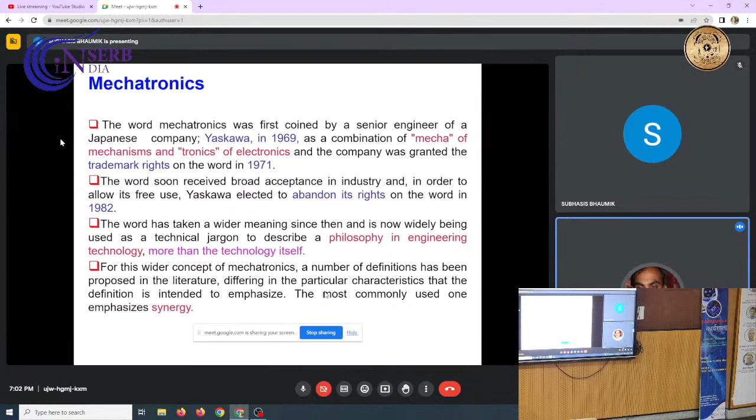So, the fundamental definition of mechatronics: it is the synergistic combination or integration of precision mechanical and electronics engineering in the morphology of the design of either the product or process. So, mechatronics is either connected with product development or process development. The prima facie for the integrated approach of design of complex engineering systems leads to the doping of the concept of electronics and control systems in it.

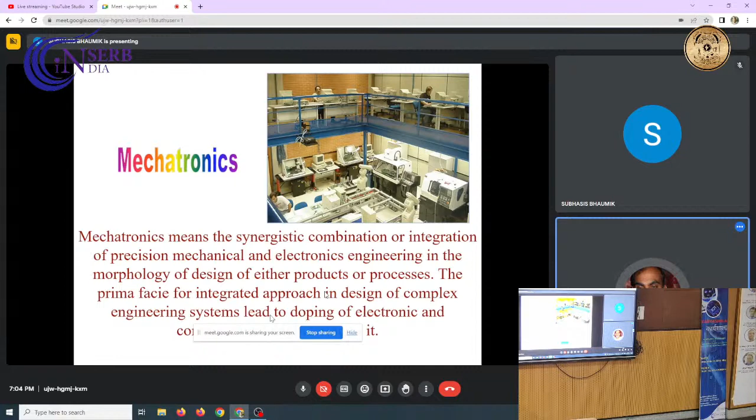So, it will be better if I show you some examples of this kind of products.

There are micro pumps used for pumping fluids, or pumping medicine into patient bodies. Sometimes the doctor wants the medicine injected into the patient's body over a duration of 24 hours, so 10 ml of fluid has to be injected over that period. Whereas in a normal injection process, 10 ml of fluid enters the patient's body within a fraction of a second.

So, there must be some sort of mechatronic system, some sort of automation system, which will work for 24 hours and move the plunger in such a way that there are very small micro-level displacements. Continuously, fluid or medicine will be entered into the patient's body, but over a duration of 24 hours.

Then anti-lock braking systems - most four-wheeler systems nowadays come with anti-lock braking systems. The mechanisms or control systems used for driving all these particular products are nothing but mechatronics.

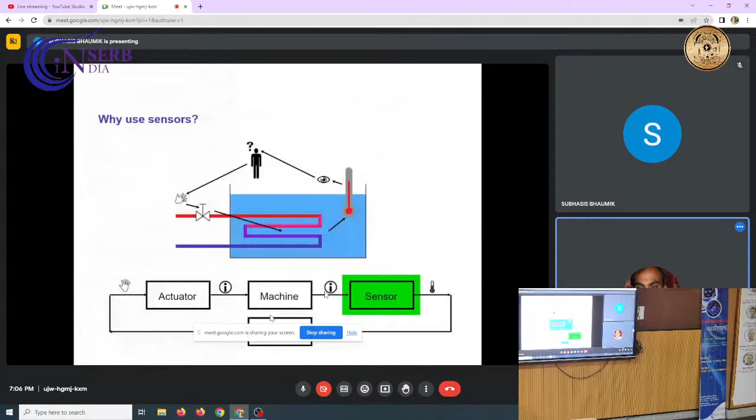If you see the formal definition of the robot: an automatic apparatus or device that performs functions ordinarily ascribed to humans, or operates with what appears to be almost human intelligence. This is basically the Webster definition of robots.

But the actual working definition of the robot has been given by the Robot Institute of America, from the applications point of view: a robot is a reprogrammable, multifunctional device designed to move material, parts, or tools from one location to another in a repetitive way, in a programmed form. So, this definition is more appropriate from the common perspective.

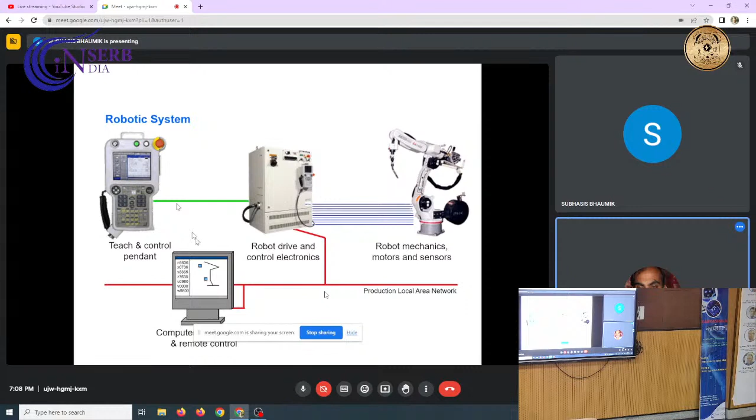3D applications of robots - where robots will be used. Number one is dirty, when the environment is dirty. If the situation is dirty, it may not be possible for a human being to do this kind of activity, so for that purpose, you can think of replacing a human being from that dirty environment with a robot.

The second one is dull - meaning repetitive type of things. For example, if a person is supposed to do a task repetitively, like picking up a bottle and bringing it to place it over here, then having to repeat that again and again - this is a kind of repetitive, monotonous task. So you can remove the human being from this type of task and replace them with a robot. The situation is dull, the environment is dull, the action that needs to be performed is dull.

The third one is dangerous. For example, in case of a radioactive power plant, there are certain tasks that need to be performed by a human, but the environment is hazardous, a radioactive environment. So you cannot send a person to do certain types of tasks there - humans cannot be located at that location. So you have no other option but to apply a robotic system, because the robot is not a living element, so whether the environment is hazardous or dangerous, it does not have any effect on the robotic system.

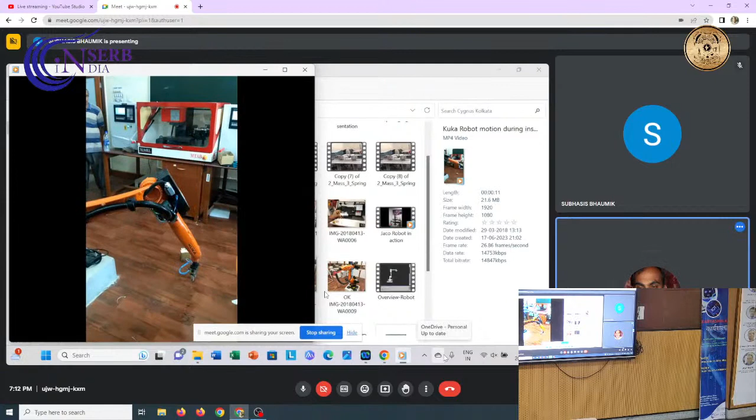Now this is an industrial model, not a laboratory model - this is a full-fledged industrial model, and this robot can handle a load of 5 kg. So if you put a load of 5 kg to the robot's gripper, the robot hand, then it will be able to move it with that particular load.

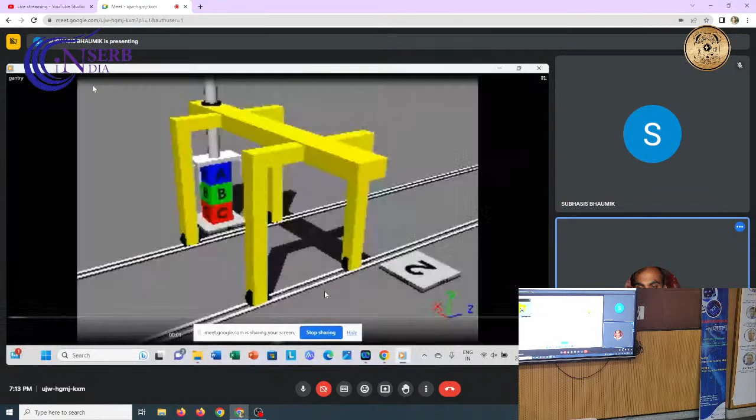Now you can see that this is another robot, okay, and we generally call these Cartesian type of robots. Now this is not an actual robot, these are simulations, okay.

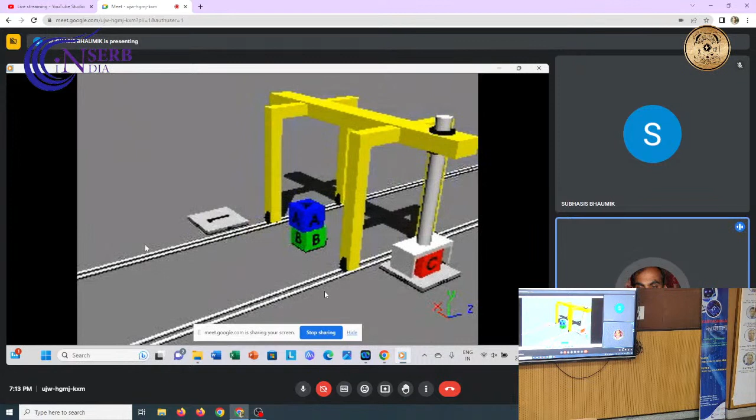So sometimes what happens in most cases, the academic institutes, financially we are very poor institutes. So we may not have the fund to purchase the robots, and that robot nowadays may be costing about 25 lakhs. Maybe all the institutes cannot invest 25 lakhs of rupees for the purchase of real robots. So what we generally do, we try to show how the robotic system works through simulation.

So I am just showing you one simulation model, and this is known as a Cartesian type of robot. You can see that the robot is moving along the x axis, the y axis, and the z axis. So we have 3 axis, this has 3 axis motions: x axis, y axis and z axis.

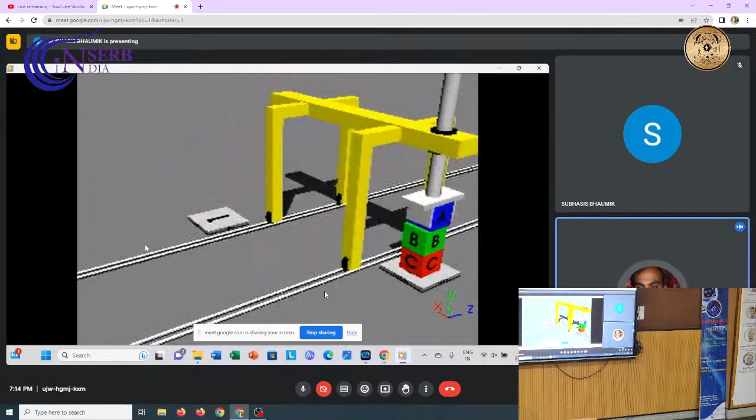Also it can have 3 axis at the gripper end. Generally we will say that the robots have 6 degrees of freedom. Most of the robots are 6 degrees of freedom, 3 for the position purposes and 3 for the rotation purposes. We generally call them pitch, roll and yaw, and these rotations are provided at the gripper end.

This is another robot, okay. You can see that it looks like a human hand is moving. If you compare it with the first one that I have shown you, that is known as the KUKA robot. So if you compare the operations of the KUKA robot with this robot, this is known as a Kinova robot.

And this robot's movement is very, very smooth, as if a human hand is moving. Say for example, if the robot is asked to draw some picture, you require very smooth motions, the hand movement should be very smooth, and that can be achieved with this kind of robot. You can see the robot is pulling a drawer, picking up some objects from it, and then pushing the drawer back in. The operation is so smooth.

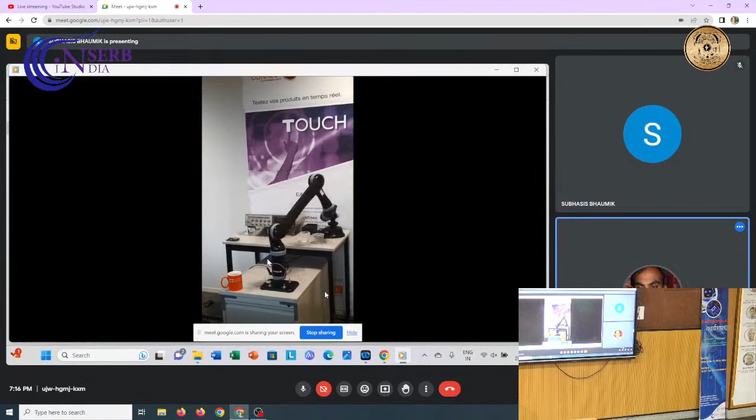So this is another category of robots which looks like a human type. More that it looks like a human means not that it is physically like a human, but from the operational point of view, it looks like a human.

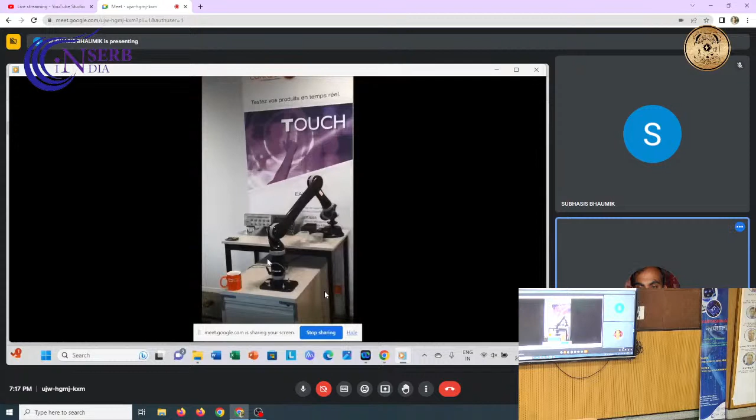Those who are from the non-mechanical background, this is for you. These terms will come up when we go into IoT systems, so I'm giving you the fundamentals so you can absorb the concepts.

Now these are machines. All of you, in your first year at the undergraduate level, went to the workshops and were exposed to machining operations. Maybe you've seen lathe machines, drilling machines, shaper machines, planer machines, and made some components or work pieces. You were given raw materials and had to machine them into finished products, using conventional lathe and milling machines, which are basically manually operated or manually controlled.

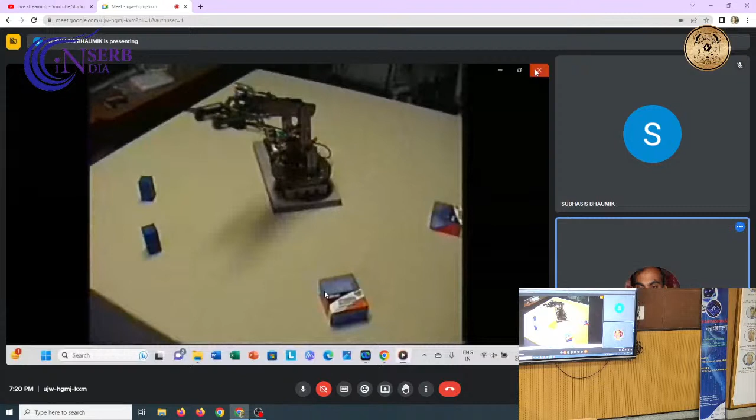But now the manually controlled machines have been upgraded, and we have CNC machines. The operations fundamentally remain the same, only the control has changed, from manual control to automatic control. Automatic control means programs - generally called G code programs or M code programs, or sometimes APT programs, automatically programmed tools. This is basically code that you write, save, and execute, and you'll find the lathe machine starts its operations.

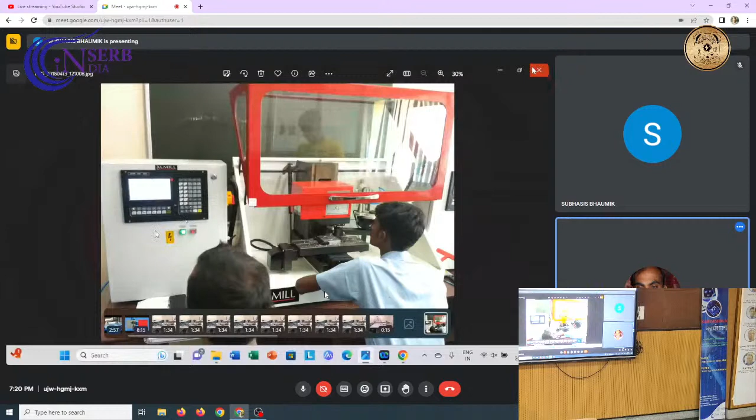This is the finished product that has been prepared, achieved with the help of lathe machines - these are computer controlled machines. So when IoT comes into the picture for the manufacturing sector, all these robots and CNC machines will be coupled together. Unless and until they are coupled, we will not get the real benefits of IoT systems.

It's not taking. It's not coming. Let me put it in the slideshow.

So, the actual title of the talk is IoT, transforming the world where AI and ML meets robotics.

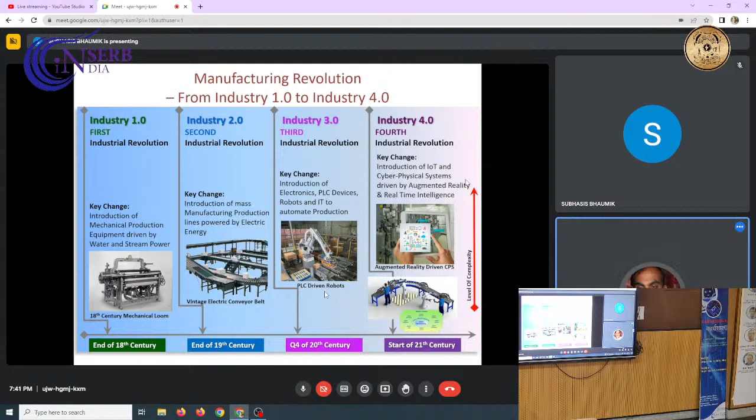Okay, it is not the change in the micro form, it is the change in the macro form. Macro form changes means something different, something new has been introduced into the systems, and which is creating disruptions. It is breaking the conventional rules, conventional norms in the factory, and that kind of technology, we are looking for.

IoT is one kind of technology which, practically speaking, has brought disruptions into the industry. So if you apply this concept of IoT, you will have a gain, you will have an advantage. If you are not applying the concept of IoT, probably you have to die. Industry has to die.

So technology is driving the change. We require change, always we expect. Change is basically a dynamic process. And sometimes we say that if a person becomes static, that means the person is already dead. So a person also needs to be dynamic, and change is a symbol of dynamics.

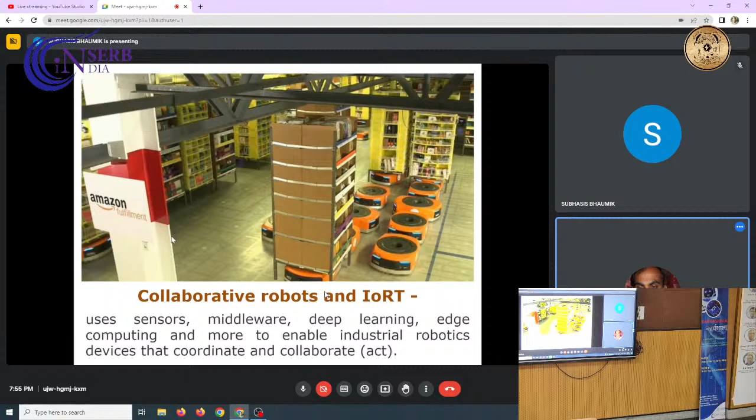Another application of IoT is in the medical field, for patient care purposes. It can be used for patient care, patient monitoring, continuous 24-hour monitoring, and also for surgery. You've all heard about robotic systems, and big hospitals are applying robotic systems for surgery, where the doctor sits in one location and the patient is in another. With advanced technology, the doctor can operate on the patient even if the patient is in Jamshedpur and the doctor is sitting in Kolkata. With the help of these advanced robotic systems and IoT systems, it is possible.

Agriculture is another important field where one has to apply this IoT concept, because of conditions like the soil and weather conditions. Based on all these, you can decide whether a seed has to be implanted in a field or not, and that kind of decision may be taken by a robot using IoT concepts. There's no need for the farmer to be present at the field level; they need not go there. You can have machines, not just robots but autonomous systems, that collect data about weather and soil conditions and then take their own decisions, like smart homes or telepresence robots.

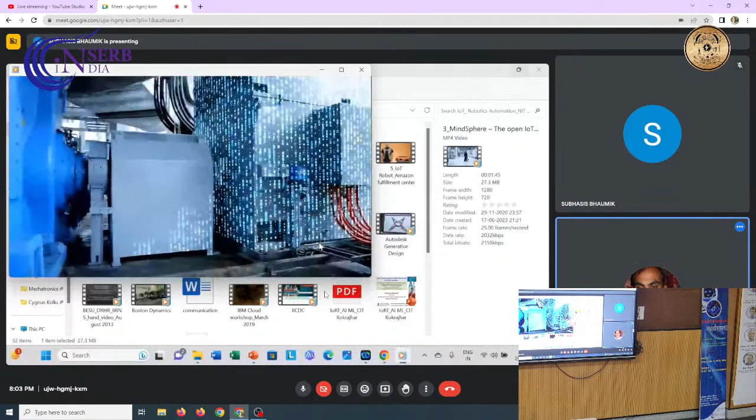Today, data is everywhere. For companies, it's become one of the most important resources, essential in the age of the Internet of Things. To unleash its full potential, we must transform this flood of data. I'm trying to show the industrial status, how this IoT and robotics concept has been applied to industry. Siemens is a company that has worked in this area for a long time, and these videos indicate the advanced levels of IoT and robotics, how industry is thinking and applying this concept of IoT.

Systems of various manufacturers gather data from a multitude of sources. Advanced analytics and applications from Siemens, our partners, and other providers transform this data into valuable knowledge.

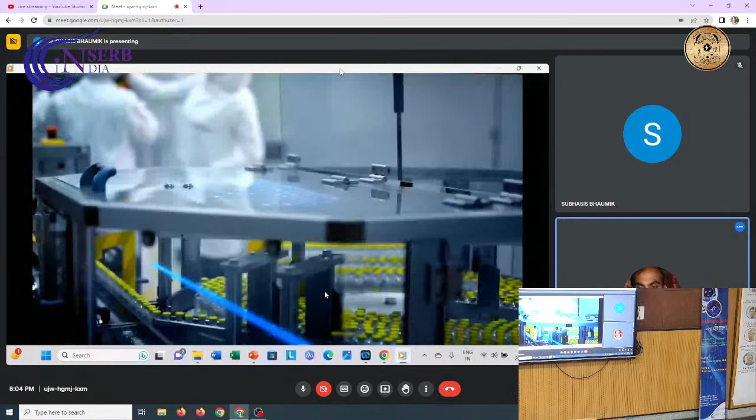Okay, I think these videos are not coming in properly. I will show it.

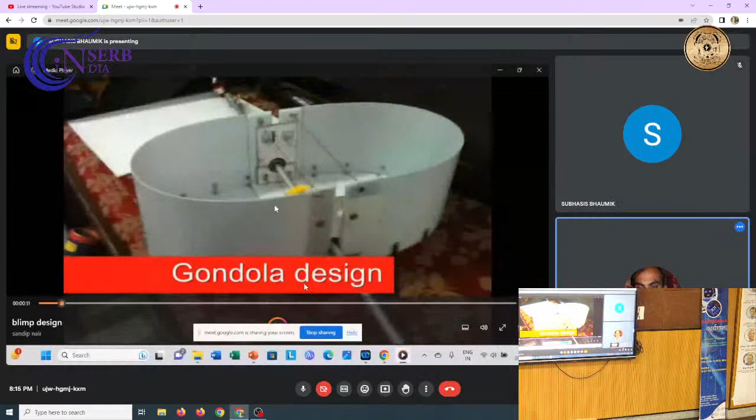I am showing another application of this IoT, and it's not playing properly. It's so slow, I don't know. It's not coming like a video, it's coming like static images only.

So you can see this is a balloon, a blimp. Technical name is blimp. It is filled up with helium gas, and it can fly in the sky like in the air. The objective of developing such a system is that it can be used for surveillance purposes.

So what you can do is place this kind of object. Not coming. I don't know why it is not coming. This, huh, it's playing in the laptop properly. There is a network issue. Sir is presenting, that's why it's not showing, not coming in the dynamic form, that is wrong.

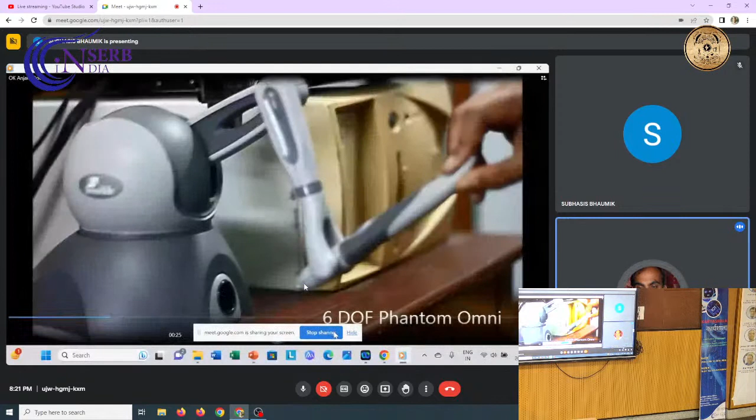See, this is a joystick, and this joystick is almost similar type which is used basically for gaming purposes, video games. So the children play video games with the help of these joysticks. This looks similar to those joysticks, and with the help of this joystick you can control a robotic system.

A lot of problems are there. I am not able to show you. Stop.

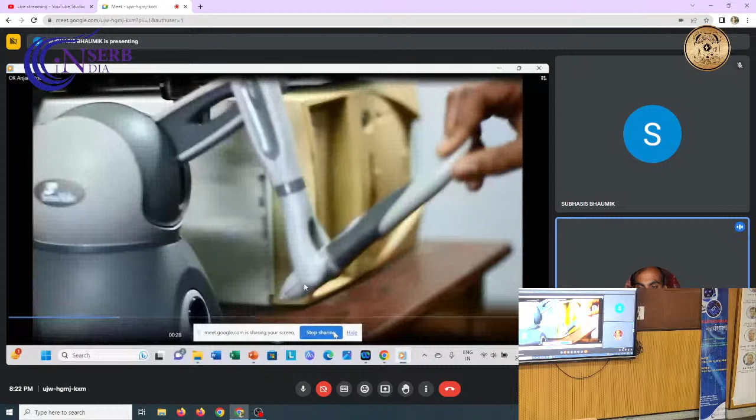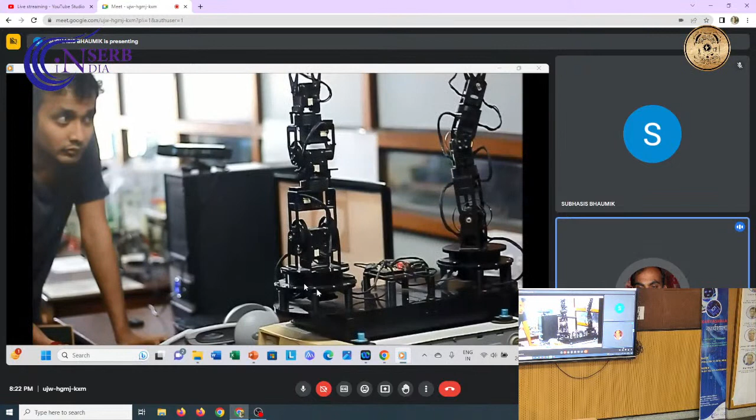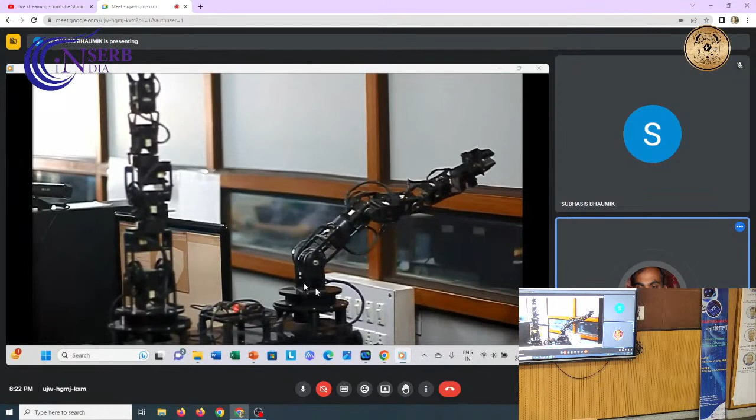Can you see that there are two black colored robots, okay, and these black colored robots are like a right hand and a left hand. Now there are certain tasks which require to be performed by both hands. Most of the time we can do any kind of operation with a single hand, but there are certain operations that need to be performed with both hands. Say for nut and bolt tightening, we require both hands operations. So this is an application area where two robots are working in a collaborative way, performing certain tasks.

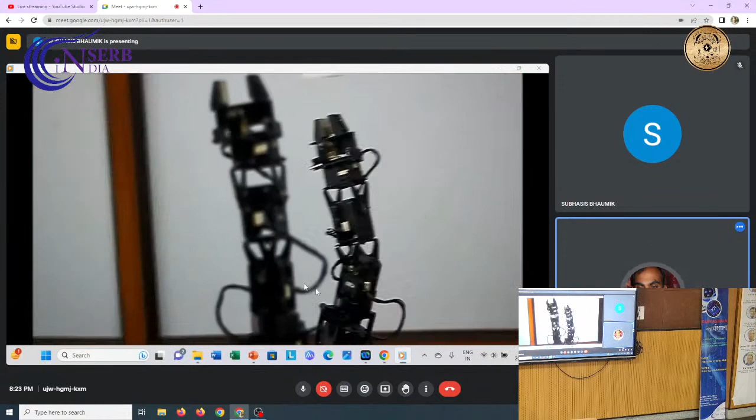The instruction is provided by the human, with the help of these joysticks. And you can see, whenever this joystick is operated, these two robots will have a movement.

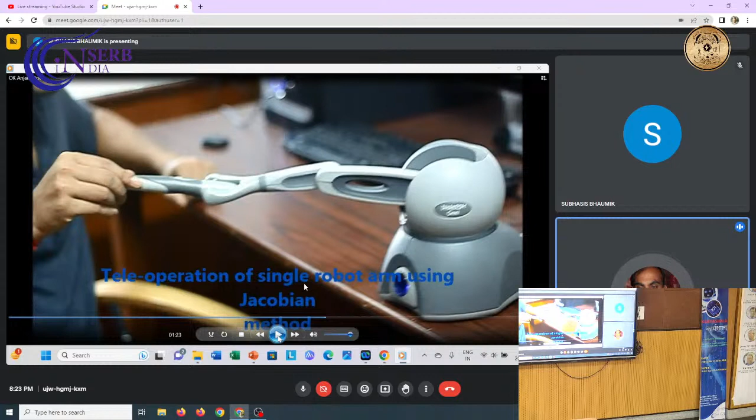Now just think that this joystick is placed with the doctors, maybe the student is replaced by the doctors. And these two robots are placed in an operations room, operation theater, near the patients. So the doctor is sitting somewhere else, maybe in Bombay. He is a very specialized doctor in a particular area, a particular type of operation, and you are taking the help of this doctor for certain operations.

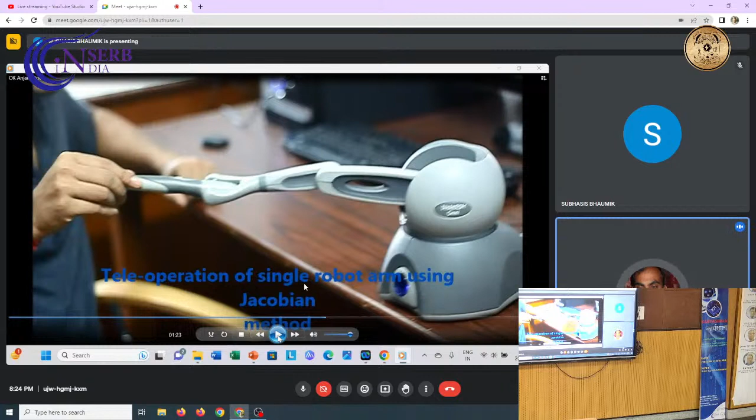And this is possible with the help of the internet, IoT. Because both systems, the two robots and these joysticks, should be connected through the net, the internet. Here you can see these joysticks, the two robots, the human beings, and the other accessory devices, medical gadgets, they are all connected with the internet. And only then can you take the real benefit of IoT. So this is an application area, medical field applications, showing how the IoT concept is used.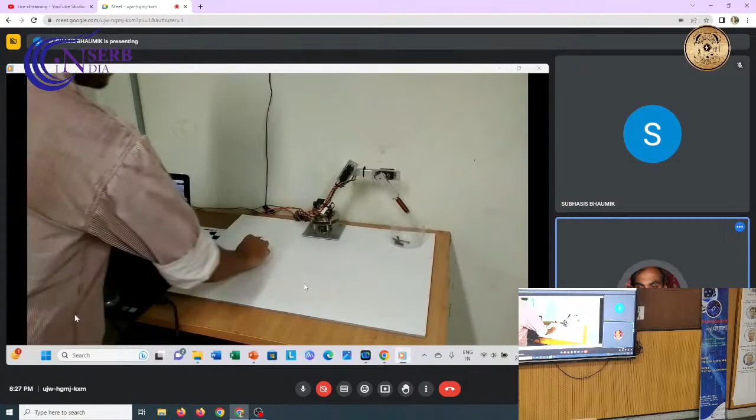Now here also there is no conventional type of kinematics used, no equation is solved. Basically the robot is driven by AI. There is a camera placed at the top of this platform, where the objects, the ferromagnetic materials, are placed. The camera grabs the image and finds out the locations of the objects, the XY locations, and the robot moves towards that particular location.

Previously, the robot was taught what configurations are needed to reach particular locations. What is the configuration of the first arm? What is the configuration of the second arm? Configuration means the rotation of each joint needed to reach particular locations. This is stored in a table, in tabular form.

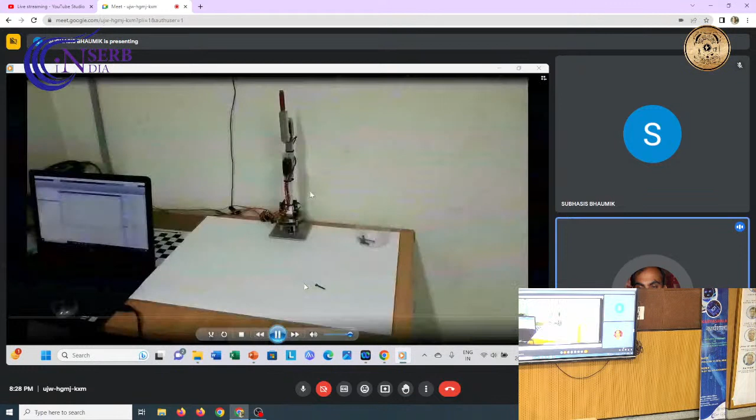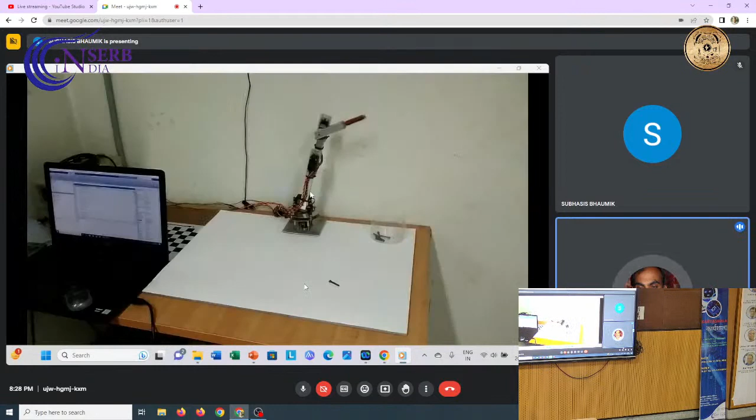So whenever the camera finds an object and detects its location, this information is sent to the robot controller, that the object is placed in such and such location. The system matches this, and the robot controller matches its position with whatever position has been provided by the vision system.

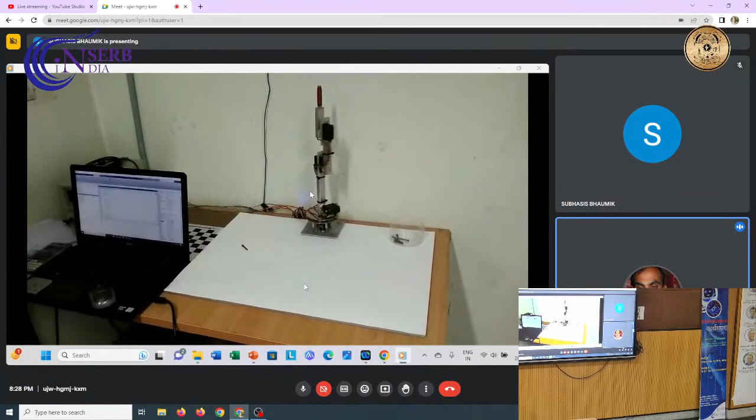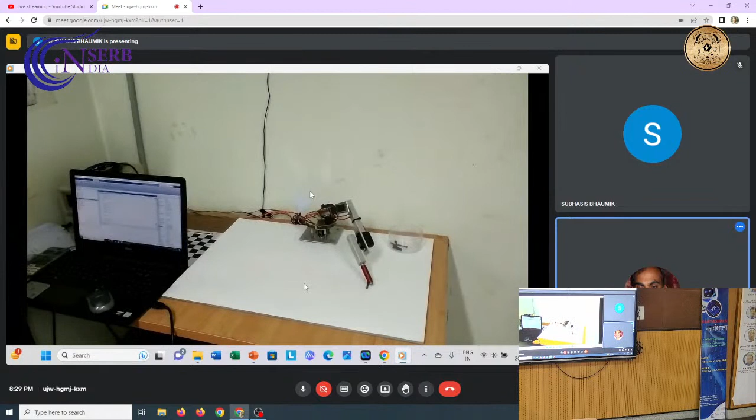It checks whether this particular location is available in the Excel sheet or not. If it is available, it goes to that location. If not, it extrapolates from known locations and known configurations. So if there's an unknown position, to reach it, the system explores using data already available from known positions, and then reaches that particular location.

So these are very simple examples of AI in the robotics area, and students can take up any such problems. At undergraduate level you can take up such a problem and develop this small type of robot. It's hardly difficult.

Everything is available in the lab, like mechanical parts, mechanical components, small electrical motors. So you just design your arm. The only other thing you need is a camera system, so you can use a laptop camera for grabbing and image processing purposes. So in a very cheap form, within a reasonable price, maybe 500-600 rupees, you can develop your own robot model.

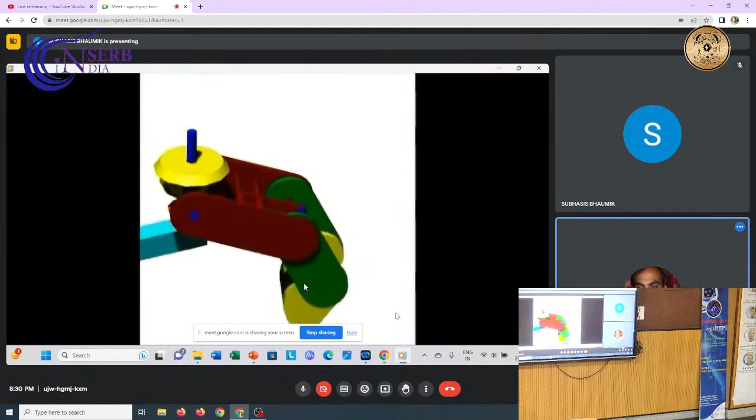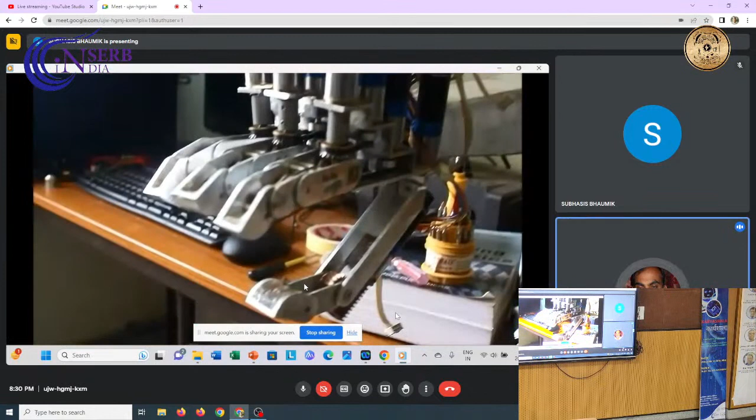This is a hand, we call it a robotic hand. This robotic hand looks like a human hand. As I already mentioned, robots are employed in radioactive environments. But in most cases, what happens?

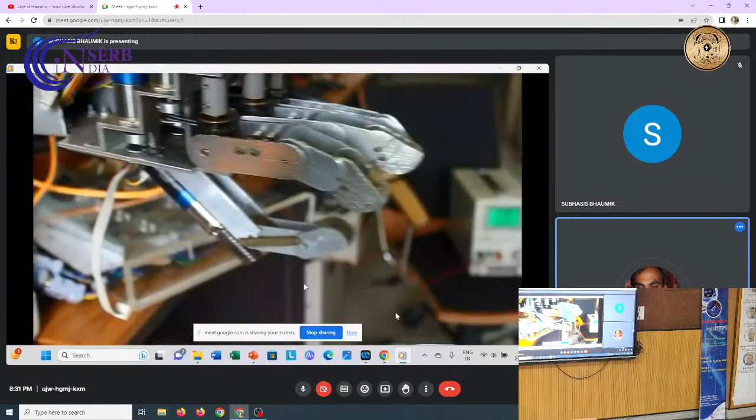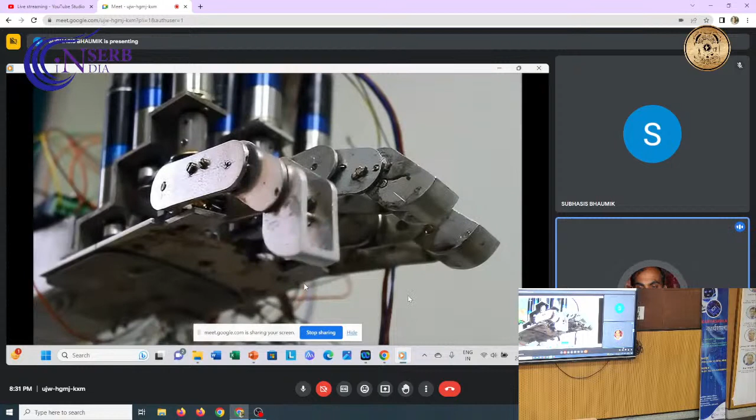The objects that need to be handled are regular in shape, either cylindrical, spherical, or cube type objects - shape is regular. But say you have to handle an object which is irregular in shape, like this kind of object, very irregular in shape. Now the question is how the robot will grab it.

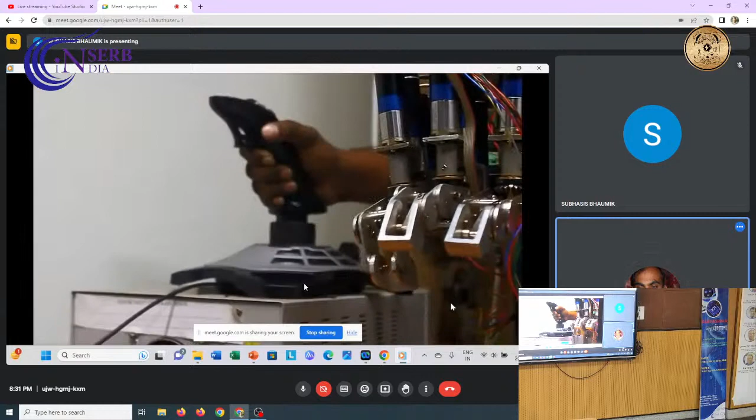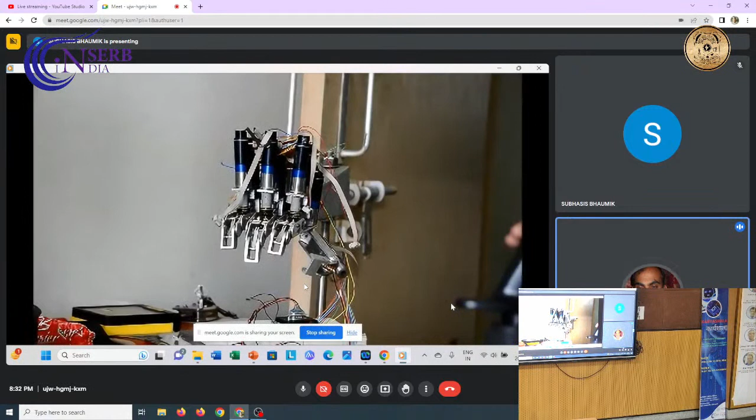If you compare yourself with the robot, how do you grab it? If it's a cylindrical object, we know how to grab it. If it's a cube, that's fine, we also know. If it's a sphere, we also know. But whenever it's an arbitrary shaped object, we have to think about how to adjust our fingers so we can grip that particular shape. In most cases in radioactive environments, object handling is a very critical task, and objects are not regular in shape.

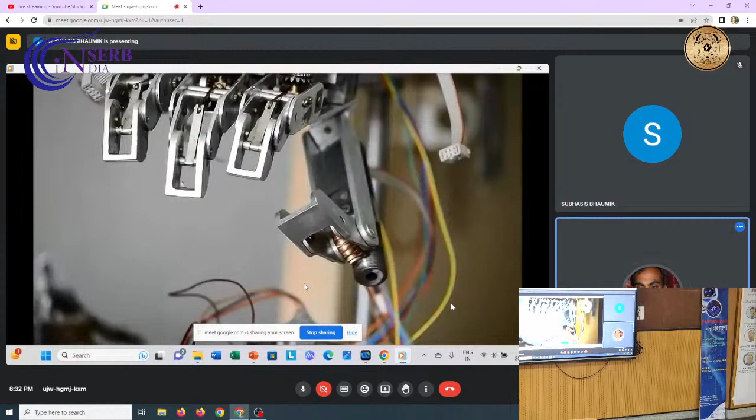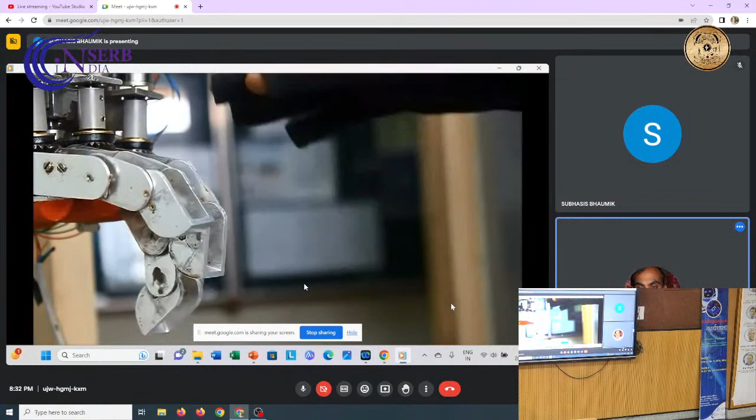So we try to develop a hand known as the dexterous hand, and it looks like a human hand, because we find that this God-gifted hand is such that there is no other gripping device in the universe better than our human hands. So we try to biologically mimic the operations of the human hand and develop an electromechanical hand type of system.

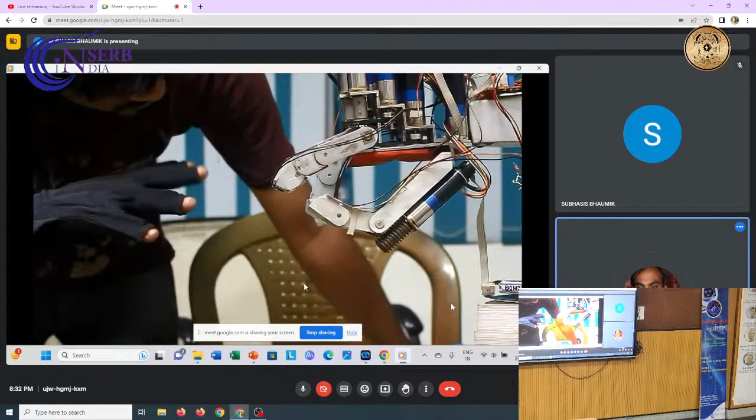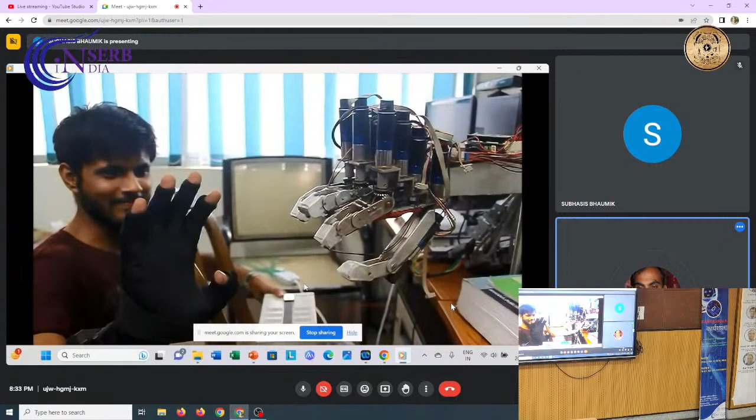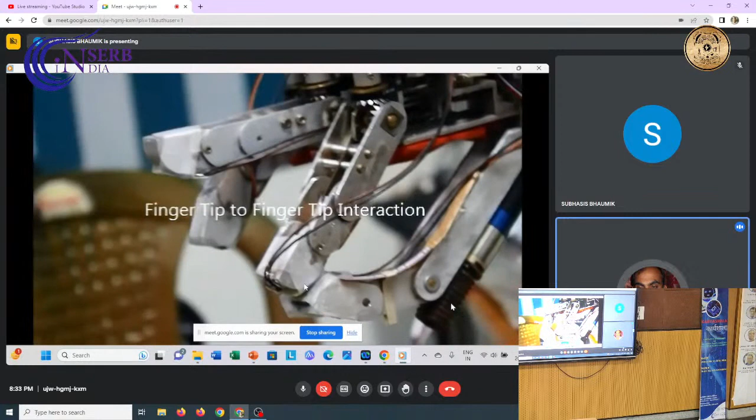You can see that this hand is operated remotely. A person is wearing gloves known as electronic data gloves. The person operates with the electronic data gloves, and whatever joint motion takes place is captured by the electronic gloves. This information is sent over the internet, and the mechanical system is connected through the net as well.

Okay, so if their systems show they are very near to each other, you can couple it directly or indirectly. If you test your IoT concept, you attach the data gloves system, send the data through the net, process this data and these informations, and then give the instructions to the robot hand, how the robot hand will move or operate.

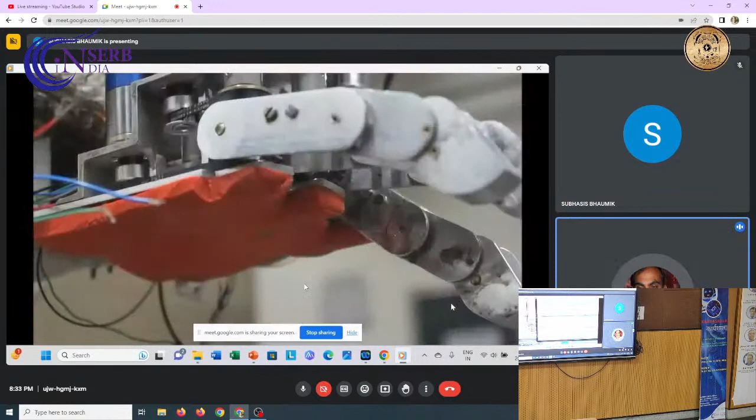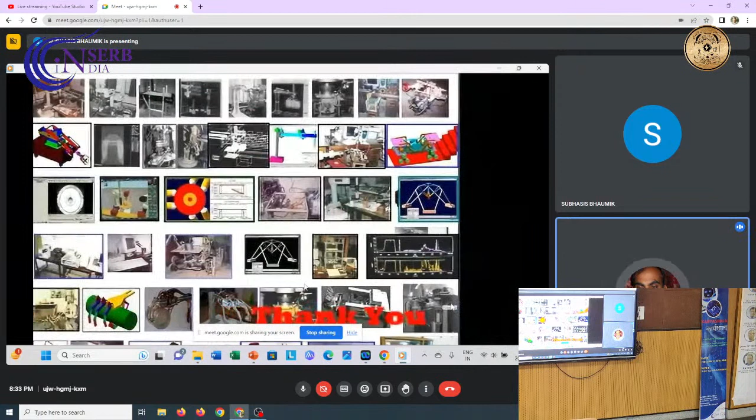Whenever the data is captured by these data gloves, the data is very raw, and from the raw data one has to process it, and then find out what should be the grasp configurations, whether the object will be gripped like this, or like this, or like this.

So you can see the utility of this IoT is not only that you capture the data and use the raw data. There is a lot of processing operation taking place after capturing the data, and that processing is really important. Here you can use the AI and ML concept on the data captured, and then you will find the real beauty of the IoT systems.

Okay, only one or two I will just show. I'm just trying to provide you some idea about it.

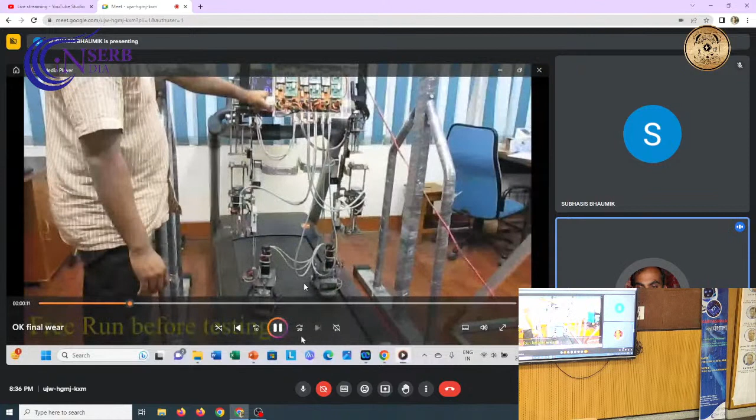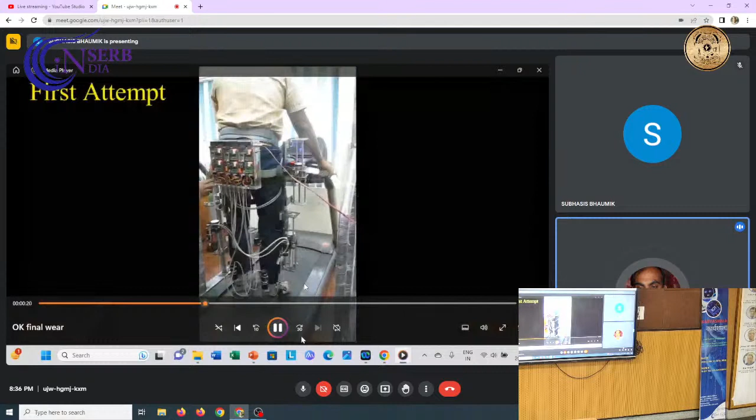This is known as an exoskeleton system, which has been developed in our laboratory also. These systems are useful for persons who cannot walk, who have some sort of spinal cord injury problems, and because of that are always wheelchair ridden, they cannot stand or walk. So for them this is a kind of electromechanical system, and this is not IoT connected, but wearing this device a person can walk.

So a person can walk, you can see the person walking on a treadmill. Similarly the person can, at least, walk on a conventional floor. So that is possible.

Anyway, there is a controller unit at the back side, where it is placed. You can see the mechanical structure, and all the joints are connected, because you have to create the leg motions, the way we walk, so similarly the mechanical system also should work. This is one of the areas we work in, known as biomechanics or biomechatronics, sometimes also called biorobotics.

As I am unable to show you the videos, this is not playing. And the last one I will... okay, anyway. So I tried to show you some of the areas in which we are working.